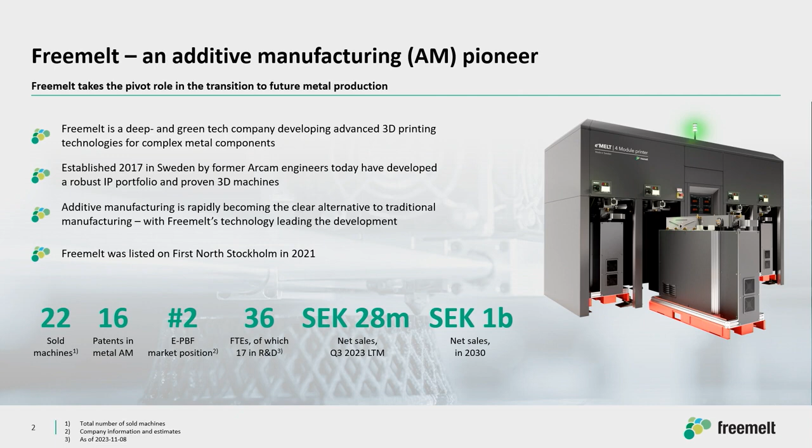During the past 12 months, we have had net sales of 28 million, and we have an ambition to be a market leader. At this moment, GE is the market leader, who made the acquisition of Arcam. But we would like to take over that market position by 2030, and at that time as well, we should have a business turnover of roughly 1 billion SEK.

So what is 3D printing? So 3D printing in a nutshell, I mean, it's the opposite to metal cutting or machining of metals. Instead of having a big piece of metal that you machine down to the end application, like in this case, an orthopedic implant, you actually put powder into the printer, and then layer by layer you build the application in one kind of process. You import a digital file, so a CAD drawing, into the machine, and then it automatically starts to print. So it's really a true digital manufacturing as well.

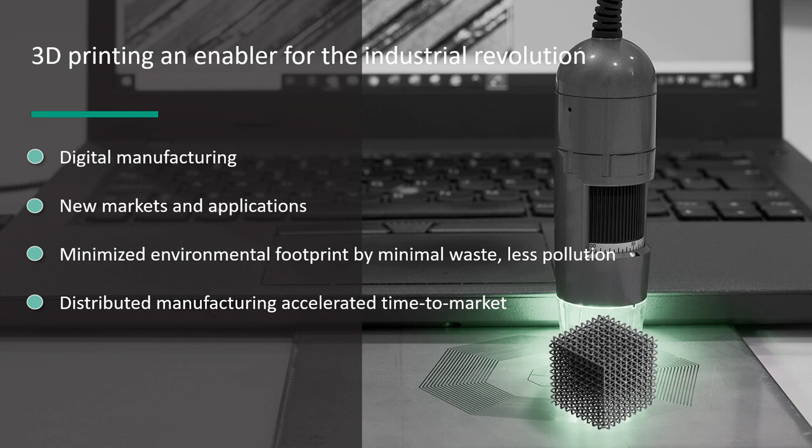Other benefits with 3D printing is that you can also build and design the product really after the specific kind of application. I think one of the key benefits as well is that you can also put in different kinds of material structures and properties really suitable for the application. Same kind of thing if I take this hip cup from an implant point of view. Here it's titanium, and you can really build it from a structure point of view that is good to really get the bone ingrowth into the implant, but also to make it lighter, of course, if you put it into the body, and strong. So that's, of course, also a key benefit.

The other part is that you can also move your manufacturing footprints. Instead of having it in different parts of the process, from the metal cutting in one part of the world, and then you ship it around, you can actually put the manufacturing closer to the end user as well, which brings also, of course, a lot of benefits.

An outcome of this as well, it's also really driving or enabling, I would say, a big part of the green industrial transformation that is happening. So it's really much better for the environment as well. So first, when it comes to waste reduction, again, if you take the big piece of metal that you need to cut down to this small piece, you have a lot of waste. If you take the powder and you build it exactly in the shape that you want, you have pretty much no waste. And then you can also reuse the powder for the next build.

The next part, as I touched on already, was more from a supply chain point of view. So it's of course time, but you also put out a lot of pollution if you ship heavy materials around the world. So from that point of view, it's also better for the environment.

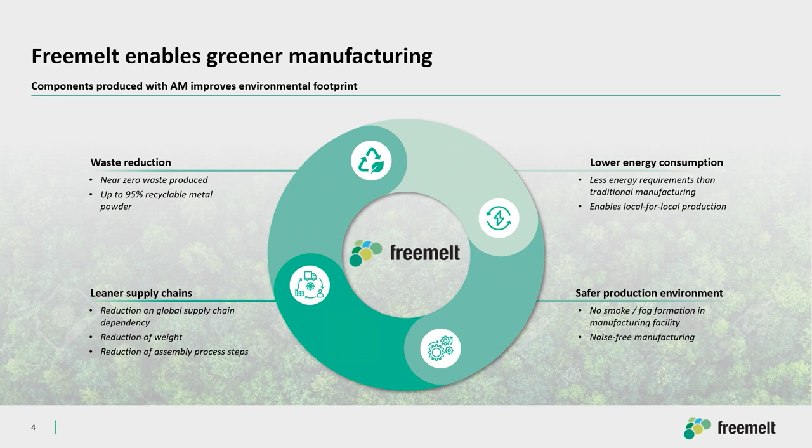There are different kinds of technologies in 3D printing, and as I said, we are in powder bed fusion, which, when it comes to metal applications, represents, I would say, more than 60% of everything that is manufactured. The laser part is one of the energy sources. This has been in place for more than 20 years. We work with electron beam, which is another kind of niche, another kind of energy source.

And the main difference, so at this moment, the focus in the industry is going from prototyping. You have had a lot of prototype focus in the past. Now we start to go into mass production. It has taken a lot of years to get to this. But here we definitely have a benefit with our technology, because an electron beam, for instance, can move pretty much 4 kilometers per second, so an extremely high speed.

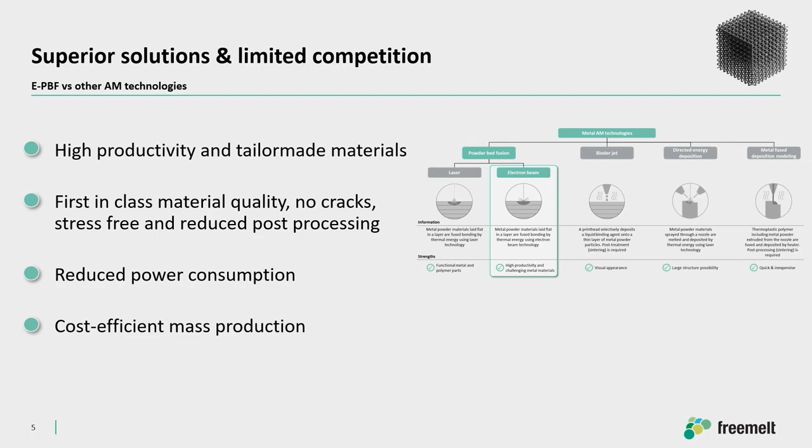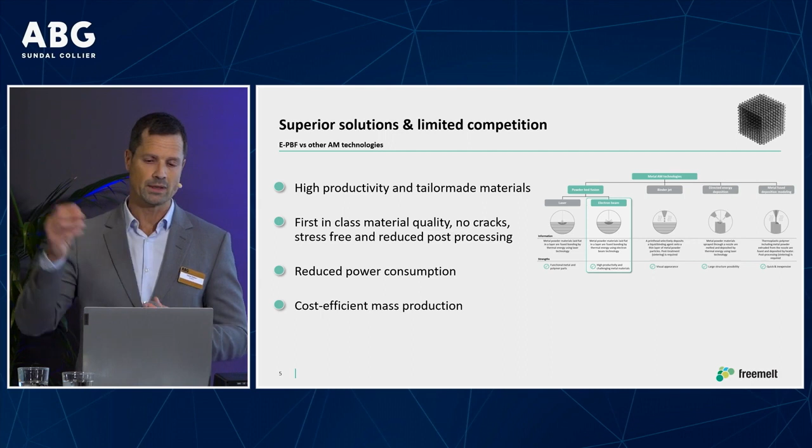The other part, which is important as well, if you're talking about material properties, is that you can also manufacture in high temperatures. We have a vacuum chamber, which means that you can print between 700 up to 1400 degrees Celsius, which makes the properties in the product much stronger and better than otherwise. So from that point of view, we're really well positioned when we're stepping into the mass production opportunities.

If we look into the opportunities in metal printing, here you can see the total addressable market. It's quite huge. Additive has been in place for 30 years, and if we zoom down on the adoption rate, starting from 2021, it was pretty much 2%, so a 3 billion euro opportunity. This has been a double-digit growing industry for many years. It will continue, with a CAGR of 26% until 2026, and I think even beyond that. So there you see the opportunity of 8 billion euro.

And I think it's important to say as well, these are applications that are printed today. So of course you have a huge untapped opportunity as well. If I take again the hip cup or the implants, only 4% of all implants at this moment are printed. So it's just a huge organic growth opportunity for these products as well.

The 4 biggest applications so far are in healthcare, which includes implants. You also have X-ray equipment, with a lot of components printed for it. Then you have industrial, where it's still a lot of prototyping and special kinds of components. Automotive, a very price sensitive market, high volumes. And the last one is space, which continues to grow as well.

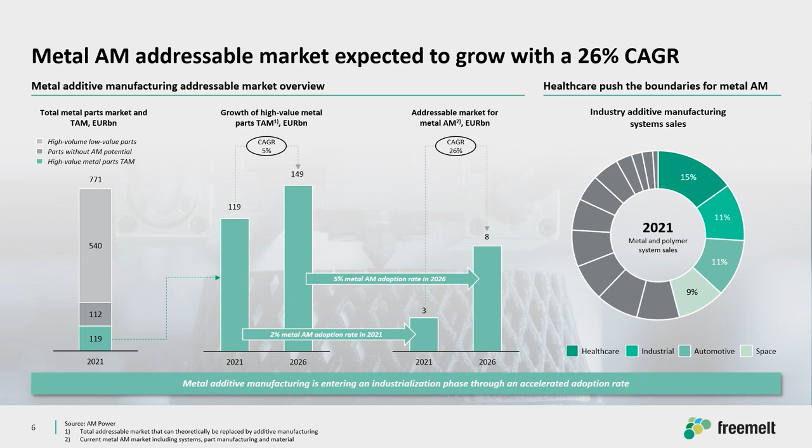This is why we target the universities and research institutes, really to get in the knowledge about additive. And of course, we would like to steer them towards electron beam powder bed fusion that we work with. So a design engineer really starts to think how to design products from an additive point of view, and also how to structure the factory from an additive manufacturing point of view. That's a key focus for us, and AM Power estimates roughly 700 machines sold by 2026. And we have a very good position at this stage.

Then tungsten. So tungsten is, first of all, the material with the highest melting point in the periodic system. So really to melt this product, you need to go up to more than 3,400 degrees, which means it's really difficult to machine and work with this kind of material. That's why it has not really been focused on before, but now we have proved that you can pretty much get full density in the material, and suddenly it starts to open up really a lot of new potential applications. Just to mention a few.

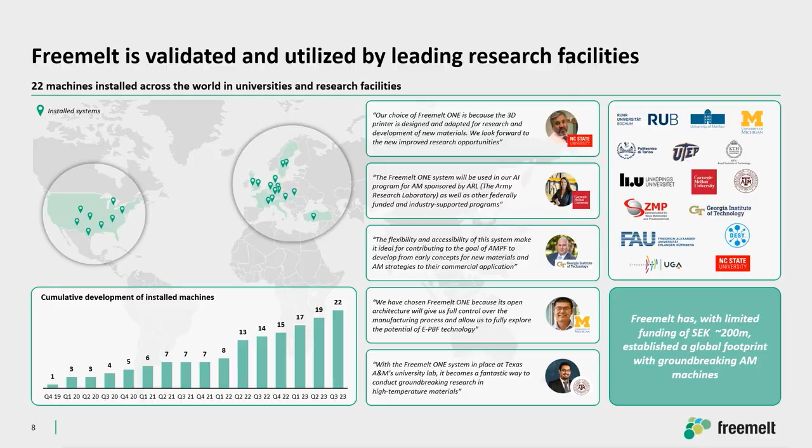If I give you one example here that I think is a bit of a role model, in the US there is a program called America Makes. The purpose of that program is that the US is trying to take back a lot of the manufacturing industry that they outsourced in the 90s and 2000s to low-cost countries, a lot to China. And to be able to compete with the low-cost countries, you need to be more innovative. You need a different type of manufacturing, because otherwise your cost will be too high.

So America Makes is pretty much about industrializing 3D printing. The Department of Defense, Department of Energy, and so forth, have given this program the task to industrialize 3D printing in the US for US industry. So we see a lot of focus. Defense, energy, semiconductor, all focus areas at this moment.

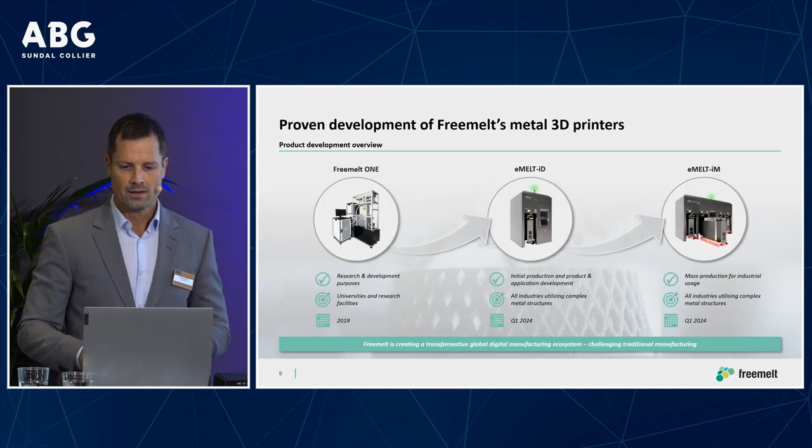The good thing also with these customers is that they have tested our product now for quite a few years. And now when we step into the industrial segment, we have, of course, taken all their feedback into consideration as well. So good beta testing, if you call it like that, for quite a few years, because we use the same core technology for our industrial offering or machines as well.

So the first one is Freemelt ONE. This is really an open research machine. A very transactional business for us, not too much aftermarket and recurring revenue on that one. The next machine that we have commercialized or are in the phase of putting into the market is eMELT-iD, and we have a one build chamber machine. So this is for your application development.

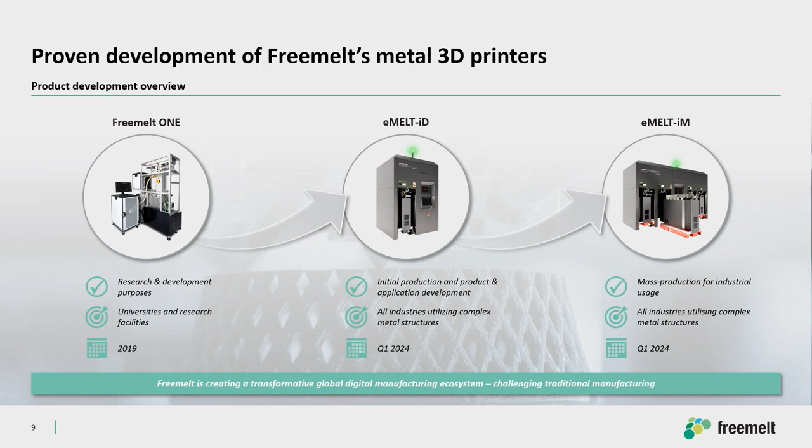So first you develop your material process. You secure that the material properties are as you want to have them. Then you need to define this application, and then you need to start to mass produce, which is the third machine, the IM. So eMELT iD is for development, IM is for manufacturing or mass production. And what you see here is actually something unique.

So again, I dwelled a bit about the poor development of 3D printing during the 30 years. I would say not much has happened in development. Most of the machines look the same, and the problem is that the machines are designed so that you have to work at the machine prior to the print. So you do all your preparations at the machine. What happens then? You block production. Then after the print, you need to stand at the machine and do all the post work there as well, which means you block the machine from production.

So we have rethought the whole concept. We have modular build stations that are independent, and there are 4 per machine. So you have 4 others in a specific area for powder handling in your factory. You prepare them during the build, and when these build units are done, you pick them out and swap in the new ones. So you do all the pre and post work in some other space of the factory. So this is totally unique.

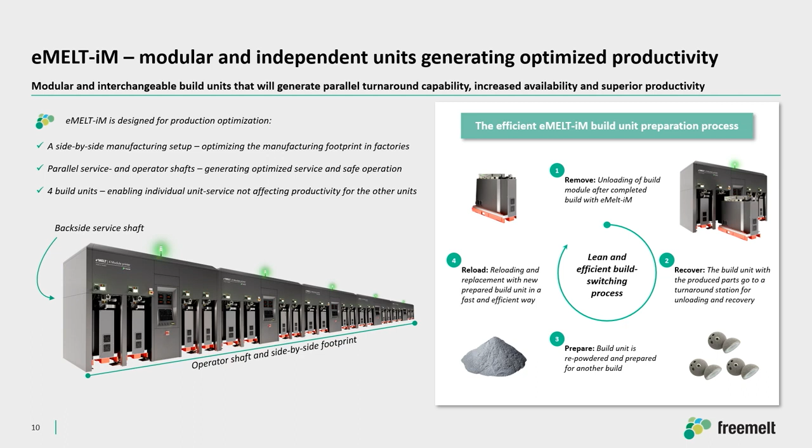The other part that is also a big hassle is that we talk extreme temperatures here, and in all the other machines with big build chambers, it takes 6, 8, maybe 24 hours to cool it down before you can take it out. So the machine is just standing there, not able to produce. And here we have active cooling during the build, which means that within less than 30 minutes you can take them out. So really the key here is to increase the availability for productivity.

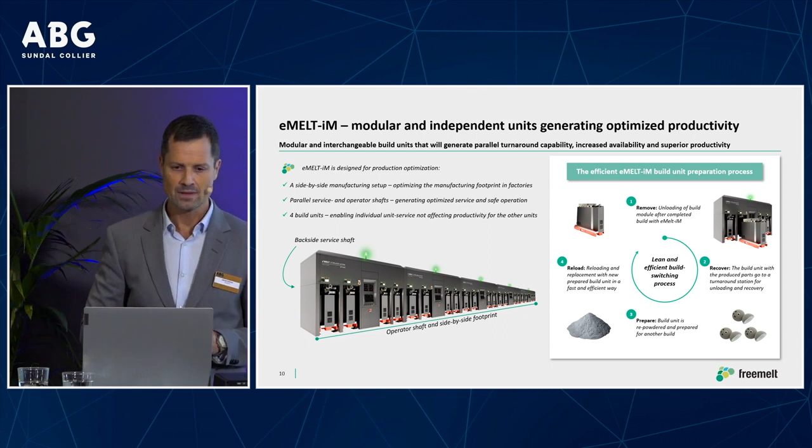Over the years now, we took the decision to work closely with industrial partners to really make sure that we develop a concept and a machine that will bring down the total cost of ownership for the specific applications that we target. And this is one example. This is the one build module compared to all the other peers in the industry. And here we are at least 30% more efficient than the closest competitor. And then, of course, if you add up to the 4 build chambers, the efficiency is even higher. So we have fairly good confidence now when we go to market with this.

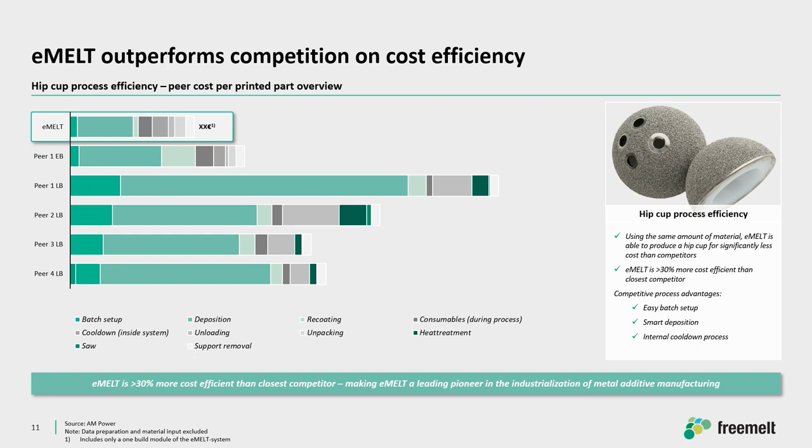If we look into where we are at the moment, we are just now in the commercialization phase. So as a company, we're moving a lot from a technology focus into a commercial focus. On research, we will continue to focus and really get more machines out there as well. But the key thing now is the industrial segment for us, where from Q1 next year we can deliver machines to our customers.

And the industrial segment will be much more a performance type of pricing and business models rather than the transactional business models that we have for the research machines. So much more focus on services and, of course, the recurring revenue from the aftermarket side as well. So to wrap this up, at this moment the industry is just at the tipping point from prototype focus to mass production. Technology-wise, we have a really suitable technology to take a good position here because it's really about productivity.

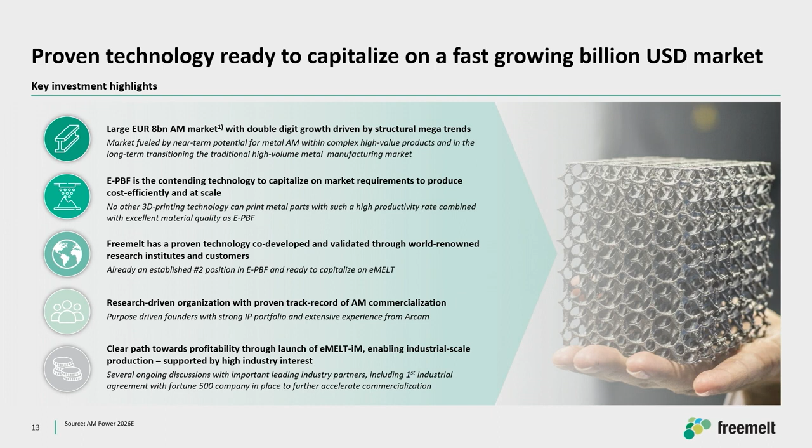This will be an important part for us as a company to take the next step towards profitability as well. So thank you. Thanks a lot for that, Daniel. Let's move on to some questions.

So you mentioned that sales so far of the Freemelt ONE have mainly been one-time transactions where you just sell a machine for X amount of crowns. Could you talk a bit about how your business model is going to develop now, partly with regards to Freemelt ONE, but also looking at eMELT?

Yeah, sure. I think when it comes to Freemelt ONE, as I said, it's really a transaction. You sell one machine, and then that's pretty much it. Not too much of aftermarket. Here we would like to go to even more universities, get it out even more. So I think we will maybe change the business model, maybe more from a leasing perspective, maybe renting, or even get a lighter kind of product with lower price as well.

But on the industrial side, that machine, we will have more of a performance-based kind of pricing. So really try to gain trust and confidence at customers that we can also deliver the total value that the customer expects to get out from the machine. So I would say we will go in two different directions from a business model perspective. And maybe in the future, we don't sell the machine, we sell more commitment on volumes that the customer can print for certain kinds of applications.